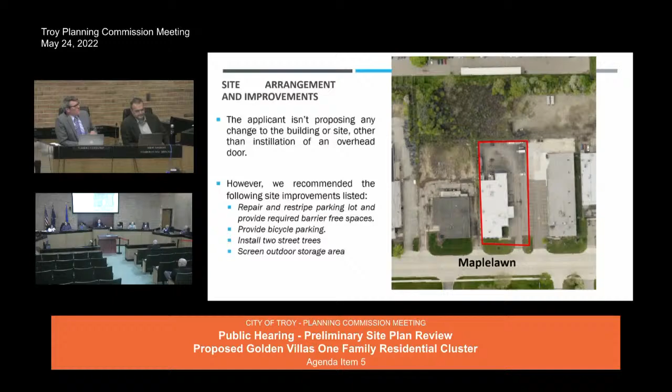The applicant did indicate there is going to be some outdoor storage of vehicles. The location was not provided. He said behind the building, so our assumption would be in this general area. A requirement of the ordinance is it is screened, and screening was not indicated, but will be required if this does move forward.

You know, it seems to me several or more years ago, we had another repair facility. It was on 15 Mile, and the question was outdoor storage, and I think, if my memory serves me right, we did not want any outdoor storage in that facility.

Outdoor storage is permitted in this district and permitted with this use, provided that it is screened in some form of manner, a fence or a wall or something of that nature, to be approved by the Planning Commission. Yeah, so it might have been that they provided some screening. So again, as this moves forward, the applicant will be required to provide screening.

Okay, I'm satisfied. Thanks. Any other questions? Mr. Biegner. Directly north and then in the back part directly to the west, what are those exactly? What parcel are we looking at?

Directly north, this parcel, this part is actually part of this parcel here, kind of makes an upside down L. Zoned industrial, zoned IB industrial, and this is the backside of this building. Again, this is also zoned IB industrial. And the distance from their north line to the apartments, from property line to property line, is about 160 or so feet.

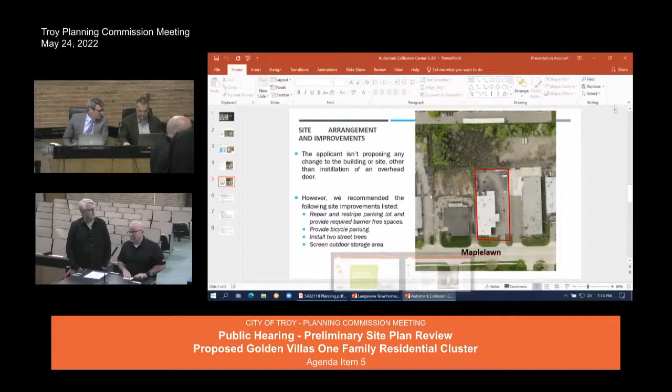Okay, thank you. Ms. Perakis asked: when you're going to install a new overhead door, where is that located, can you put the elevations up? Is that all you're doing, just one? It would be - there's one door already, so there'd need to be one more to kind of make a loop out of the building. So there's one in the back, and there'd probably be one on the east wall.

He's trying to get the elevations up there. I did see photographs earlier, yeah, they're in our - there we are. So there's an overhead door in the back of the building, on the north side, and there's nothing on the side.

So that opening on the very right of that picture could become an overhead door, on the actual side of the building where you can't see it from the main road. That's in the back, so just to the east of that, on the east wall in the back, right where that wooden fence is, somewhere there. Okay, so it'd either be there or right where that hand is now, to the left. Yeah, or I believe there was an overhead door there at one time, and they put a window in there instead.

Yeah, when we toured the building, it was fairly evident that this used to be an overhead door from when you go inside, so seems like a natural place for it.

Okay, and one other question was, I read somewhere about the screening, you're proposing 8 feet in height. When I drove over there were tons of trees, there was already a natural screen, like a buffer between the residential and your property. So where are you putting a screen? I would put screening around the whole fencing, and possibly do something in the front since there isn't anything there, so just around the outer perimeter all the way around. On the sides even? On the east fence, the north fence, and I believe there's a fence on the west side in the back that separates the other property to the west.

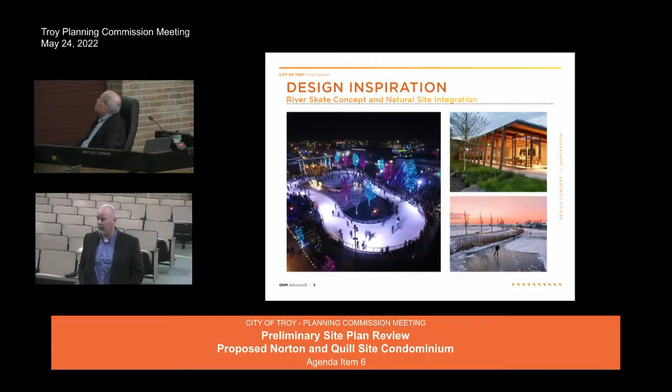We also looked for inspiration, looking at other areas. We visited many pavilions in this region, and we also visited areas that hosted outdoor and indoor ice skating. We talked to those owners and organizations about what they would do differently, how would they design it differently, and what works well. We had a tremendous amount of feedback that was all incorporated into our concept.

So the location is Town Center and Civic Center Drive. If you're familiar with where the Kmart corporate headquarters is, it's that corner. It would be an extension of the Jeanne M. Stine Community Park and provide additional amenities.

Again, this is very high level, just a concept. We haven't decided 100% on anything, but this is what we're starting to work our design off of. So we have our ice skating ribbon. We didn't want to host hockey tournaments here - that's not the intent. It was intended to be a family-oriented recreational opportunity. We also wanted this to be a four-season facility, so when looking at the concept, we make sure the pavilion can support four seasons, and so could the ice skating rink.

Believe it or not, roller skating and rollerblading is gaining popularity again. In fact, just driving here, I saw a couple roller skating inside the Jeanne M. Stine Park, so that's something it could be used for in the summertime, and other events as well.

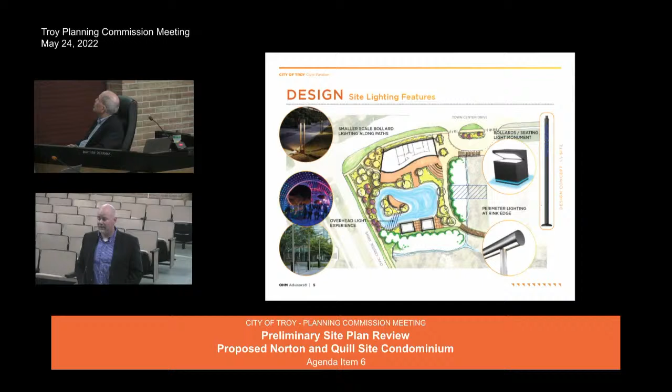One of our guiding principles is making sure the amenities are usable. So when we talk about lighting, we talk about bollards, they could also be seating arrangements. We want everything to be used and purposed well. And lots of lights - that seems to be a common theme. We want the lights to be an attraction.

The pavilion, it started when we started our concept - this is probably version 256 - but we actually started with a fully closed pavilion. That was in conversations with Sterling Heights and the city of Farmington, who both said they wished they would have had a closed pavilion.

So we designed a closed pavilion, and through further discussions on the size and the funding available, we went back and thought, okay, they wanted a closed pavilion because they didn't think about how to heat it in an open pavilion. So as we're designing this pavilion, we will have radiant heat to take the edge off the cold, but if you're going to ice skate, you're going to be dressed for the weather. So we'll program this space based on the weather as well.

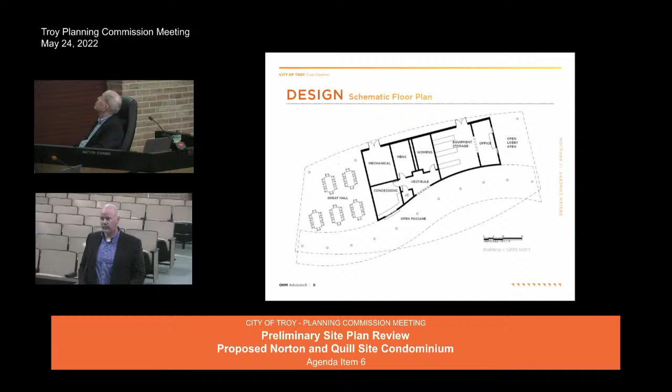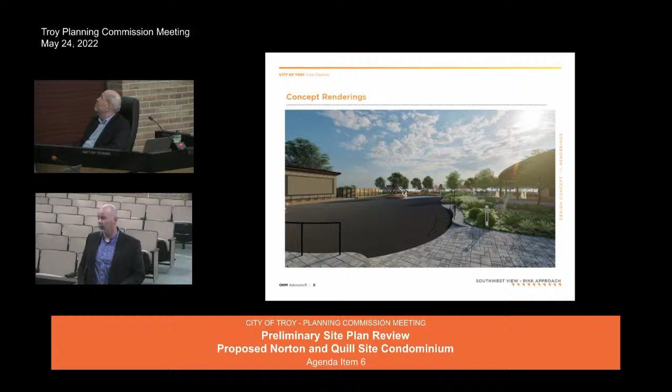And like the Jeanne M. Stine Park, this park also allows for a lot of expansion, a lot of what I call icing on the cake. We may not be able to afford the video screen on the Zamboni storage right now, but we certainly want to design for the future, where when funding becomes available, we can add that type of amenity. A little further back, looking at the design and feel of that pavilion overhang, it really opens up opportunity to program just outside of that pavilion as well.

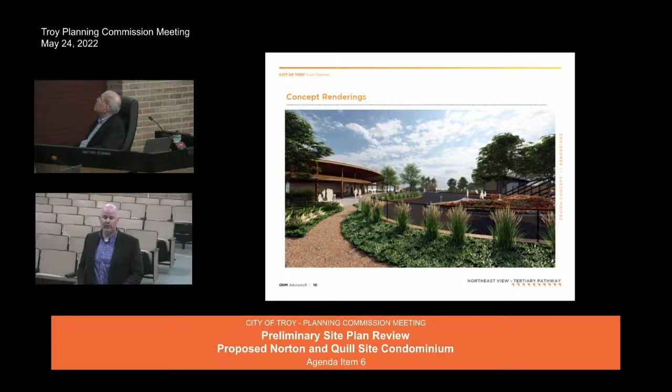This is a look into the existing Jeanne M. Stine Park, to the east. The landscaping, we plan on fitting in with the DDA re-landscaping design plan, and that theme is consistency through nature. So using a lot of native plantings, using a lot of natural stones that you would find in Michigan, but placing that in a consistent manner.

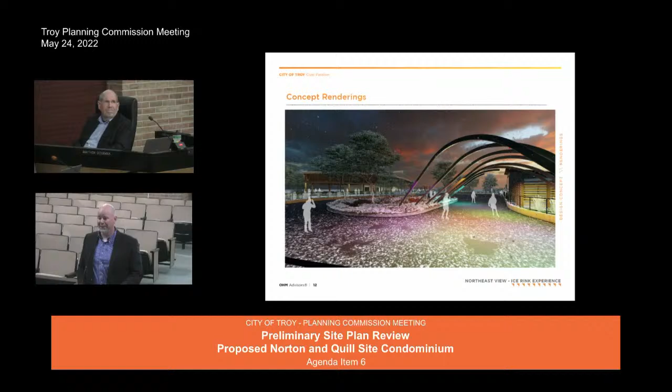We have a very, very aggressive schedule. I didn't mention that in addition to the $1.5 million we were awarded for the community project funding, the city intends to use 4.5 million of its ARPA funding towards this project, for a total of a $6 million project. So this schedule is very aggressive, and it has already been announced, so now I'm stuck to it. But the plan is that this will be fully operational in October of 2023.

Council did approve a contract with OHM to start into our design work, taking this concept into design. We just had a meeting, there had to have been 20 people. So OHM assembled a wonderful team to start on this project, and they're very aggressive in the design process. So with that, I'd be happy to answer any questions. The intent of this tonight was to introduce the project to the Planning Commission because you'll likely see it again, so we wanted to make sure you're aware that this is going on and eventually see an official site plan.

Great. Thank you, Mr. Bovenseep. Any questions from the commission? Yes, Ms. Perakis.

I have some questions. I love it. I love the idea. It's beautiful, and I love all the detail with the lighting. I think it's going to add a lot.

In terms of parking, are you planning on being able to use the aquatic center or the community center? Because I know we talked about a drop-off, but where are people actually parking for this?

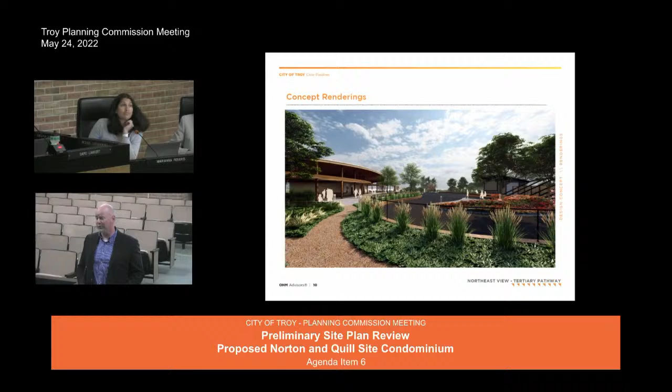Sure. I didn't really mention that Troy's missing a downtown, because I think everyone is aware of that. But with that downtown comes that feel of walking to the amenity, so we didn't want a parking lot directly next to it because we think it would detract from the amenity. So we have parking, 64 spots in the Jeanne M. Stine Park near the skate park. To the north, when the tennis racket club isn't being used, we have about 75 spots there.

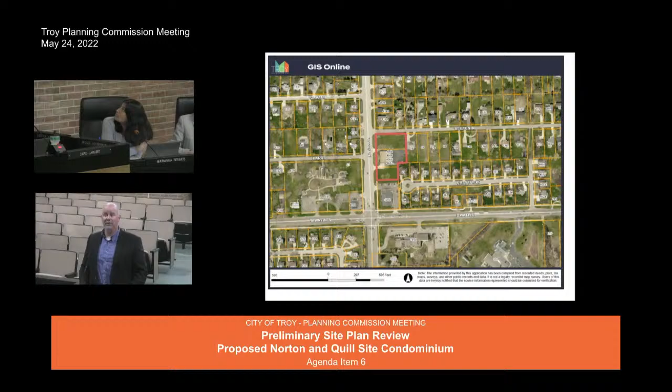The aquatic center, community center. Eventually, I would like to see the original design of the Jeanne M. Stine Park, Phase 1, which had a pedestrian bridge connecting that North Community Center lot directly into the park. So hopefully one day we'll be able to put that pedestrian bridge in across the county drain, and that would create another walking feature, closer to the community center parking.

So the feasibility study suggested we have plenty of parking for this amenity, and you're just going to have to walk to it. Yeah, no, I love that. I was just curious if you had to have an agreement with all those places, or if you're just able to use that, but it sounds good.

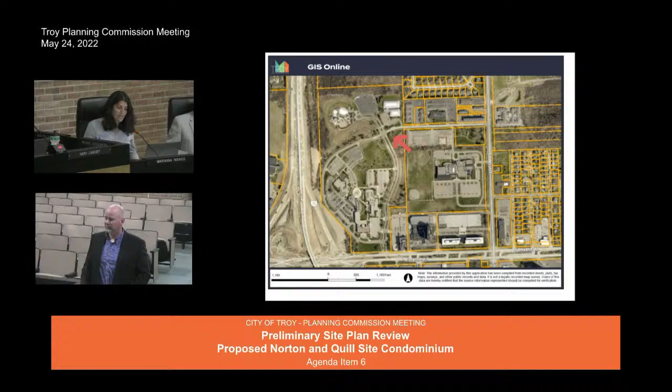In terms of the skating, when people arrive, is that free, is that a service? It will likely have some sort of rental charge if you need to rent skates. We have talked to Dennis Bostic, the owner of Troy Sports Center, and other ice management companies, and the idea is that we would contract out the rental and maintenance of the ice skates, because I'm not an expert at ice skating, and we have members of the community that are. So they would supply the skates, and there would likely be a charge to rent those skates.

Okay, but no fee to go and hang around there or to skate? If you had your own skates? The amenity is not designed to be gated, there's no real entrance way, you can walk in from different points, so there's no intent at this point to have a fee to participate.

I noticed the thing about the concessions. What are the hours of operation of the park itself, and how are you envisioning offering concessions in terms of time frame? Concessions would probably be very similar to our other concession facilities at Boulan Park, Firefighters Park, and the Aquatic Center. We actually took those concessions in-house because Recreation saw it as a revenue source, so concessions could be run by the Recreation Department, finding peak hours to run them so it generates revenue rather than being a full expenditure on the city.

The park hours, this is technically a park, so it is covered under the park ordinance, so it would be sun up to 10 p.m., or 11 with special permission.

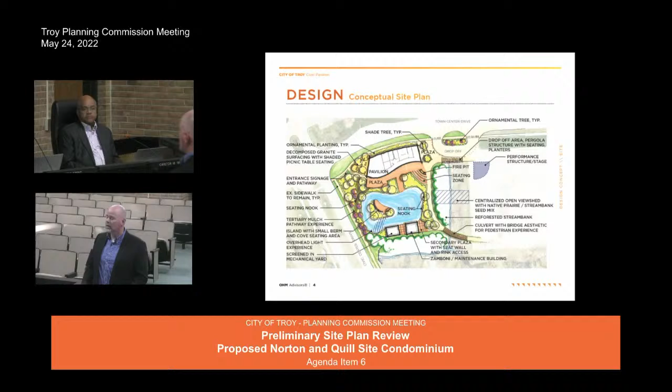Programming-wise, I know there's a lot of interest. The Troy Chamber of Commerce has interest in leasing the space during the day for outdoor events. COVID has taught us that not everything has to be inside a conference room, so there's a lot of interest in the corporate community for this pavilion. As silly as it may sound, the ice skating rink could host an RC car race event for kids. It presents so many opportunities that I think the Recreation Department will take off and run with it.

They're very excited. The Parks and Recreation Board is also very excited for this project. Any other questions? Yes, Mr. Tagle. I think it's a great start.

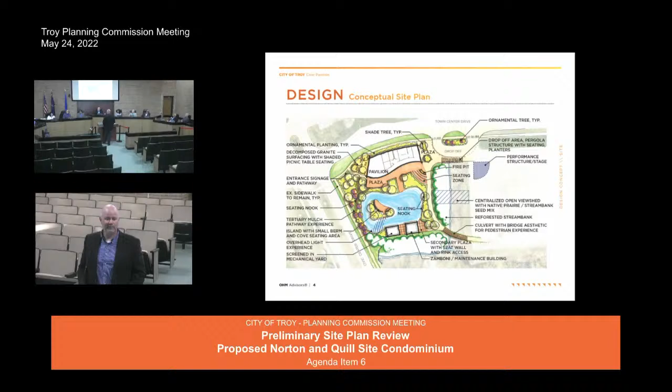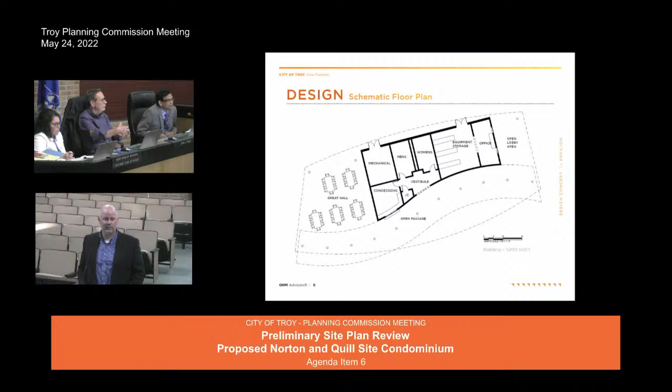I like the concept plan. One thought I'd suggest you take back to the design team: I noticed the picnic tables are kind of off to the side, more oriented towards the road or the street. Maybe if that area was more landscaped and those tables were brought in, people sitting there could watch people skating, whether ice skating or roller skating, bringing them back into the core of the development. Great suggestion, yes, I'll definitely bring that back.

Thank you, Mr. Tagle. Good idea. Any other questions from the commission? Yes, Ms. Perakis. I know you said the idea is going to grow, and you mentioned a screen at one point. Are you envisioning outdoor movies throughout the summer, maybe bringing in food trucks and things like that? With the proximity to the Jeanne M. Stine Park, food trucks over there, absolutely.

We designed that portion of the park to be able to support vehicles, so they can pull up to the drop-off zone and that could host the food trucks. My vision is almost endless, because that's been our theme as we design this project. We don't want to stop anywhere. We want it to be able to host just about anything, so anything you can imagine, my hope is that this space will be able to host it.

There were fire pits too, at least one. Yes, these are all things that will attract people to come and stay and hang out. I think it's brilliant. Thanks. An interesting lesson learned with the fire pits when we were talking with Sterling Heights: they placed their fire pits too far away from their padded walkway, so no one on skates could walk to them, and no one used them. So just interesting tidbits we're learning from other communities on how to make ours the best.

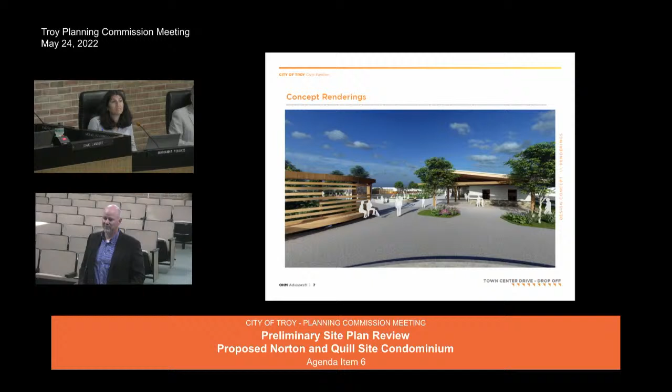Also, I love the design because you're creating a feature the public can use, but we're not competing with Dennis Bostic down the street. It's a totally different type of ice arena. So I think this is a great amenity, and we're all in agreement this will be a great asset to both the Civic Center and the city.

So as I understand, we're not actually formally doing anything tonight. We're going to wait for Mr. Bovenseat to come back with an actual site plan for us to look at. Thank you very much. Yeah, thank you, have a good night. Me too.

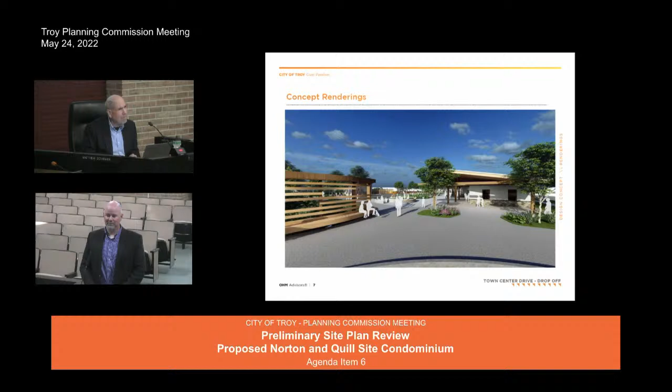All right, next on the agenda is a preliminary site plan approval, file number SP 2019-0041, proposed Langview Estates, southeast corner of Livernois and Leetonia, 4080 Livernois, section 15, currently zoned NN neighborhood node, Node H district. Mr. Carlisle. Yes, thank you.

As a little background, I believe this is at least the second, perhaps the third time the Planning Commission has looked at this project. The subject site is located on the east side of Livernois, just north of Wattles. It's approximately 1.62 acres, and right now it's improved with a recently renovated 7,000 square foot one-story building.

The property is zoned neighborhood node with multifamily residential, and the applicant is proposing multifamily residential, which is a permitted use in this district. It's adjacent to single family to the northwest, north and east, and neighborhood node to the southwest and south. The applicant proposes to incorporate 8 townhomes, outlined in that yellow orangish color just north of the existing building on site. These would front on Leetonia, as well as kind of at the corner there, as well as Livernois.

There is a third parcel, which is to the south. It's got that tree in the middle. At this point, it has not been proposed for development, but it could come in for a site plan in the future. All vehicular access to the site would be via Livernois Road.

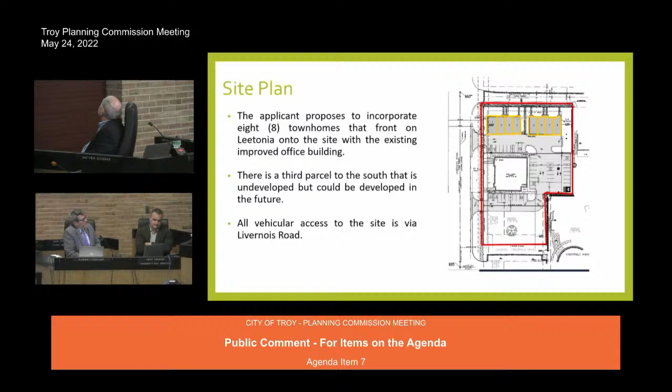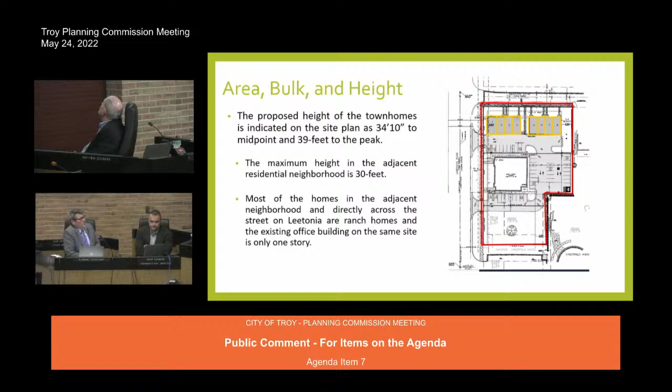One of the items that came up for discussion at the previous meeting was that of height. It does meet all the area and bulk requirements, however there has been discussion on height. The proposed height of the townhomes, as indicated on the site plan, is 34 feet 10 inches to the midpoint - that's how we measure height in the zoning ordinance - and 39 feet to the peak. The maximum height in the adjacent residential neighborhood is 30 feet, and most of the homes in the neighborhood and directly across the street on Leetonia are ranch homes, and the existing office building is a one-story building on the same site. This is the picture of the site in some context.

At the meeting on February 23rd of last year, there was discussion on the height, and the applicant had indicated they would look at reducing that height. We do think a building height of 2 or 2.5 stories would be a more appropriate transition from the single family that outlines the existing location of this particular building. So we are asking that the applicant describe how the 39 feet and 3 stories would be an appropriate transition in light of the standards we have in our form-based districts.

With regards to parking, the site, in particular the office site, is overparked. It exceeds the 20% minimum requirements that the applicant is allowed to overpark a site. The total required parking is 40 spaces. With an excess of 20%, that would get up to 48 spaces. However, the applicant is asking for 59 spaces, so that exceeds the parking that can be permitted without approval from the Planning Commission. So with that, there are 3 options.

One is to simply reduce the number of spaces on site, 2, receive a waiver from the Planning Commission, or 3, land bank some parking and build in the future if deemed necessary. In addition, these are 2 different uses, and so a shared parking agreement would need to be recorded if this were to move forward.

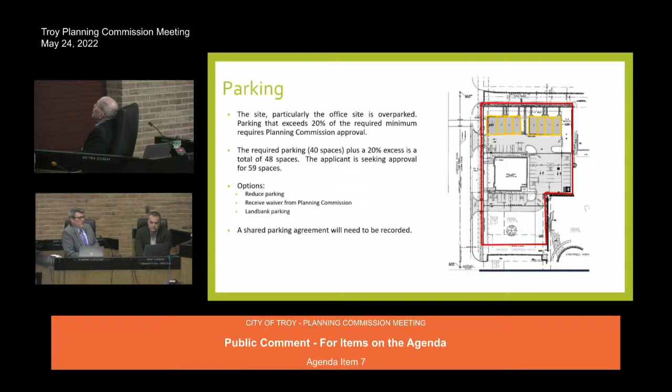With regards to landscaping, the applicant did provide a complete landscaping plan. We note that they are deficient 3 parking lot trees that are located within the parking lot. We also note that the applicant has indicated trash enclosure screening, but did not indicate what that material or the type of screening would take place.

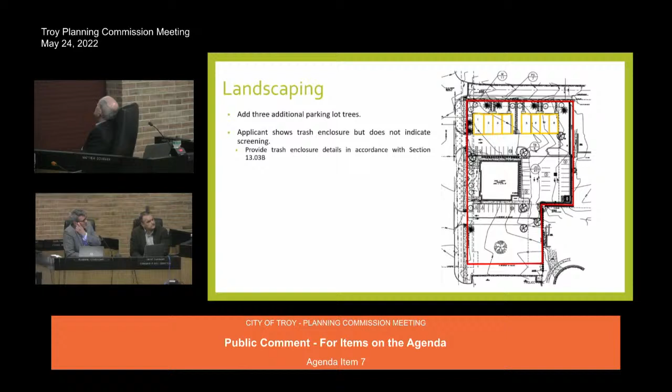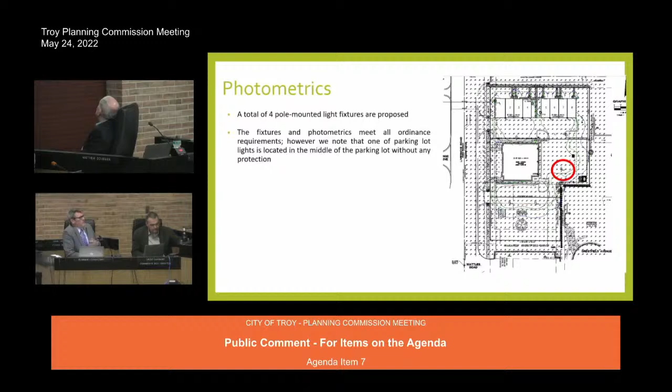The applicant is providing a photometric plan that includes 4 pole-mounted lights. We do note that they do meet the ordinance requirements with regards to fixture and photometrics, but we do have one that's highlighted in red. It's just kind of in the middle of the parking lot, unprotected, and so we think there should be a better location for that to protect it in the future.

There are standards that the Planning Commission has to review. There are 4 in the design standards and 3 in the site plan review standards. I'm going to focus more on the 3rd standard, the site plan that includes transitional features, which includes 5 neighborhood node standards.

The first is that transitional features are architectural elements or alterations to building massing used to provide a transition between higher intensity uses and low or moderate density residential areas. Second, a continuum of use intensity, where moderate intensity uses are sited between high intensity and low intensity uses, shall be developed for multi-building developments.

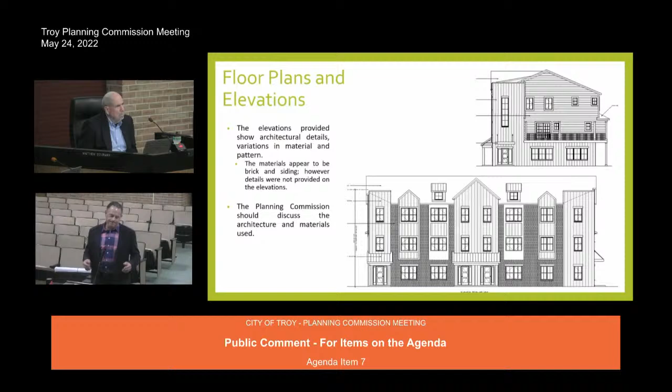Relative to the height and the parking in the surrounding area, we did a site analysis over there. Everything on Latonia—actually over 95% of the homes over there—are 2 stories.

I have gone out personally and met with all of the single-family residential people that I directly affect. I don't believe anybody here tonight is either in favor or opposed to the project, so for my benefit, I think everybody's in favor. I've had no negative response at all. The people I directly affect have become friends of ours—we communicate with them, show them our plans, and talk about what we're going to do and how we're going to upgrade the site.

A couple of key elements that I think didn't get touched on: we provided more green space against the adjacent home right behind us. We could be much closer to that property, but we've pulled ourselves off of it. As part of the process, we're going to upgrade both intersections coming into the property to today's standards, and in addition, add these properties to a stormwater management program, which doesn't exist today.

Do you have other projects? Are there other properties in the area? To the best of my knowledge, the two most recent properties—on Livernois north of me, and on Crooks south of me—are fully occupied. There's definitely a need in this community for this type of product. People are buying it. They absolutely are buying it.

The church to the north of us, which I know is historical, is higher than we are. Across the street from me, the steeple at the church is higher. There are two other facilities over there that are higher. So I'm here to work with the Planning Commission to try to alleviate those concerns relative to transitions, but from our standpoint, I think we've reduced them as far as we can so that they're still economical and feasible to build.

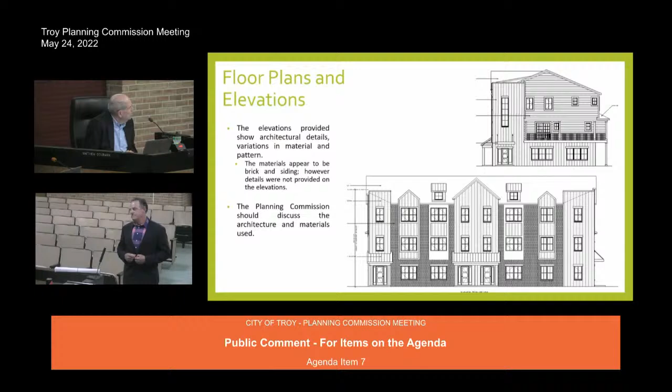Yes, Ms. Perakis: I'm wondering whether or not you've considered, instead of having parking underneath the building, that you lowered the buildings by an entire story and just had detached parking—you could cover it, but have it separate so you could not have a 3-story building.

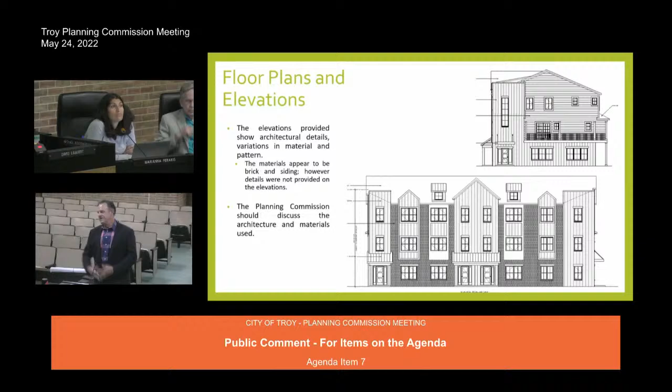This is the first time I've ever been asked to bring parking out to the public eye versus putting it in an enclosed chamber. I'm a little concerned about the parking ratios and elements because I have 16 garage parking spaces, and the remaining parking handles the overflow for visitors and the people in my building. The dimensions and the way the property works will not allow for it—I don't have enough depth to get enough parking in to cover and still build the product. The width dimension does work with that, from Latonia to my building.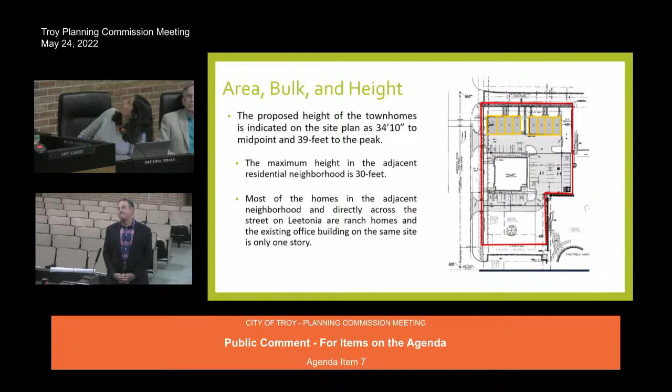With the site plan of the parking slide. There was actually a picture, maybe a rendering, I thought, with the parking. The rendering is... yeah, like that.

Okay, that's not actually accurate, I apologize. The architect did that. If you go back to the site plan, that is the plan you need to look at, because you'll notice the dimension between the garage door and the curb line. Can you go back one? Go back to the site plan. The site plan, please.

Right there, you see those parking spaces that are parallel? Those parking spaces represent overflow, and they also service the existing building that we are in. And if you notice, if you take out the 16 parking spaces that are now occupied in those homes, I don't have any room for them. Where would I put those 16 parking spaces? And in addition to that, where would I cover them? How would you get ingress and egress to the site?

So, well, from that one rendering, it wasn't accurate. It looked like there was a whole... but, and I apologize, it's the architectural rendering that somebody placed on there. That part of it is not accurate.

I think, Mr. Pangle, the point the commissioner's trying to make is you don't have to replace those 16 that are in garages on the site. You're, by ordinance, overparked by 19 spaces. So you simply would have utilized the extra 19 spaces for at-grade parking for this particular use.

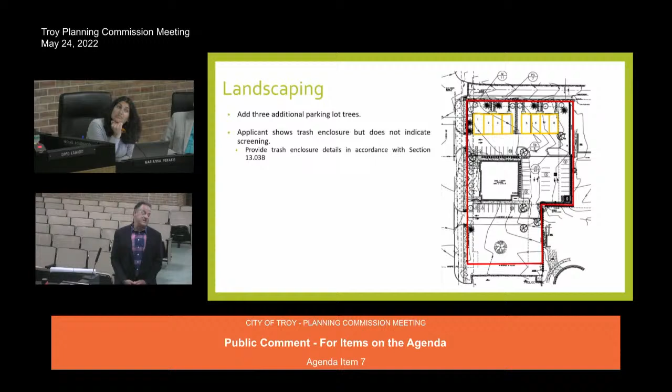And I'm struggling with where 19 spaces over, because when I did the calculations based on the engineer's calculations, there are 16 spaces in the total count. Mr. Pangos, in my report, the office is overparked by ordinance requirements based on the size of the office. So you only need 24 spaces for the office and 16 for the residential. That's 40 total. You've got 59 on site, including 16 in the garage. So it's the office that's overparked.

Any other questions from the commission? Yes, Mr. Buechner. How busy is your parking currently in the middle property? On my building, most days it's probably three quarters full, if not more.

I'd suggest you, and no disrespect to your planner, but my office building wouldn't work without that parking. Parking's huge, we all get it. It's an important feature, that's why it's behind the building, and that's why most of my parking is going to be screened, and that's why I put 16 other spaces behind closed doors. It takes less of the surface for me. And it allows me not to look for access off Leetonia, bringing traffic into Leetonia in the neighborhood, and additionally utilize the curb cuts that are existing.

And those curb cuts have been modified, those are not standard. Thank you, any other questions?

Mr. Tagle. One of the things I find a little troubling about the planning: the first residence to the east is set back quite a bit from the road. Now, the site plan doesn't complete the footprint of the residence, it shows the back wall and part of the west wall. But the massing of the buildings, the most easterly building, is basically going to overshadow that, because it's way in front of the building and much higher. And I find that really troubling. I tend to think that maybe that first building, the one to the east, should reconsider its height again.

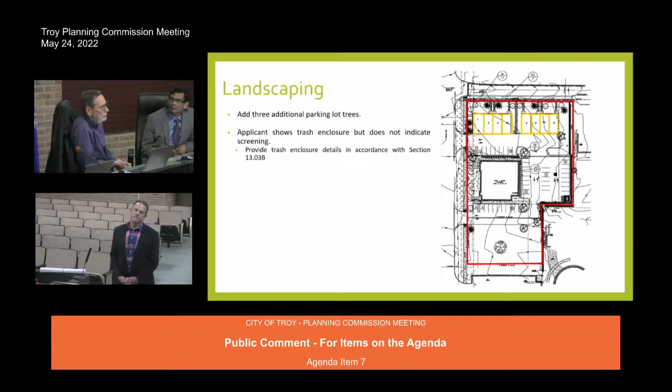Do note. Any other questions from members of the commission? Seeing none, we'll have you take a seat. Thank you.

You're welcome. And it's not a public hearing, but if there's anyone from the public that would like to speak at this time... Seeing no one wants to come up and speak, we'll bring it back to the commission for either questions or a resolution.

Mr. Chairman? Yes. I was just going to say, I agree with Mrs. Perakis's point on the outdoor parking and the overparked nature of the current site. So if that is truly accurate, then I think that's a very valid point that could address the height of the building. Thank you.

Mr. Hudson. Simply put, it looks to me we have a one-story building in the middle, vacancy on the other side, and a proposed almost three-story apartment. I think it looks like Mutt and Jeff at that point. We're down to 2 stories, that is much easier, I think, transition-wise for this neighborhood. But 3 stories, 8 buildings in there, that is massing, and that is just going to jar the symmetrics, in my mind, of looking at this intersection.